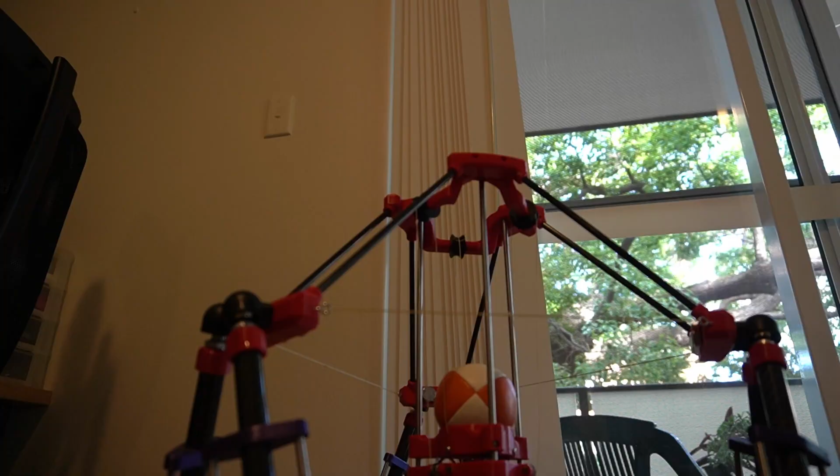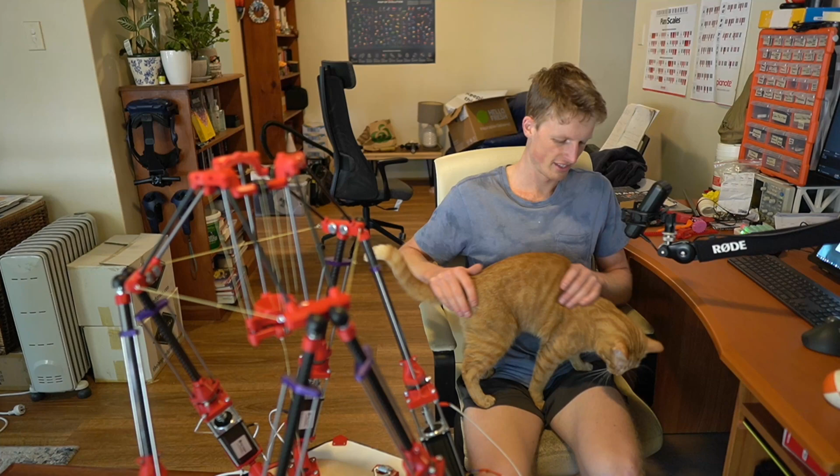Before that, I was spending a lot of time trying to get the timing right to get it to move around, and trying to key the relationship between, or map the relationship between, the legs moving around and this string getting pulled. That was a little bit tricky, and I could never quite get it to work.

So I've just finished 3.5-ish days of coding, and it's going relatively well, I think. Some parts definitely went a lot faster than I was expecting them to. The first bits I was expecting to take a really long time, like getting all of the matrix math working to calculate all of the Bezier curves. I was expecting that to be a little bit tricky in Arduino, but it was actually pretty fine. So that was good. It was a welcome surprise.

But the less welcome surprise has been the fact that the bulk of the brain part is a lot more tricky than I was expecting it to be. I think in my last video, I planned for making 5 functions to do the whole thing for just throwing and catching one ball in a very simple pattern. And I am now up to 20 functions so far. Granted, not all of them are really properly necessary, but still, figuring out how to feed them into each other is not trivial, I think.

But I made a good bit of progress. I think it's coming along quite well, and I can feel that it's close. It feels like I'm ticking off things to do faster than I am putting them on the list. So that's good, I guess. Yeah, it's coming along. I've only got like 8 more things to go on my list.

For example, a problem I've been having from pretty early on with these linear actuator legs is that there are some nuts in the bottom that I put in to stop it pulling itself apart. Those nuts have just been really annoying. They keep tightening themselves up when they shouldn't, and half of them have come loose from the vibrations anyway, so they're not even doing anything, just rattling around. Bloody nuts, causing me so many problems. No good has come from them. They're very annoying, so I'm definitely keen not to have that problem again.

Something else I'm potentially going to change is to get rid of the motor that's pulling the hand string. The reason is that the ball is only ever going to move in 6 degrees of freedom, and by having 7 motors - the 6 motors of all the legs plus the 1 motor for the hand - this is referred to as overdetermined. When your system is overdetermined, it can be fine if you carefully design it, but it tends to add complexity, and complexity is often better avoided. Sometimes it's very cool, but if you can avoid it, it's a good idea because it's just annoying.

I was having a lot of trouble before trying to map the relationship of the movement of this string compared to the movement of all the legs, because they have to be tied together pretty well. If the legs move up while the string stays still, it's the same thing as me pulling the string down, and this moves up in its rail as well.

But by having really fast legs, I should be able to entirely remove that problem and just tie the string onto the wood at the very bottom, so it'll just be stuck there. Then by moving the legs around, the string length would change, pulling the hand up. I think that's a lot better, a lot cleaner, pretty good. But that requires that the legs are fast and strong.

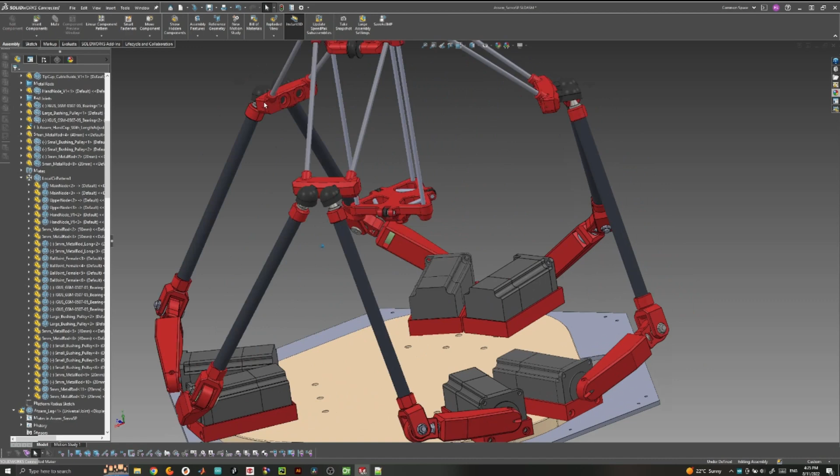So I've got it CADed up here. This is what that design looks like, and you can tell it's very different to what it currently looks like. If SolidWorks is going to play nice, I can drag this around and you can see what it would look like as it's moving. It has a bit of a hard time calculating movement sometimes, but that's what it would look like, which is very weird.

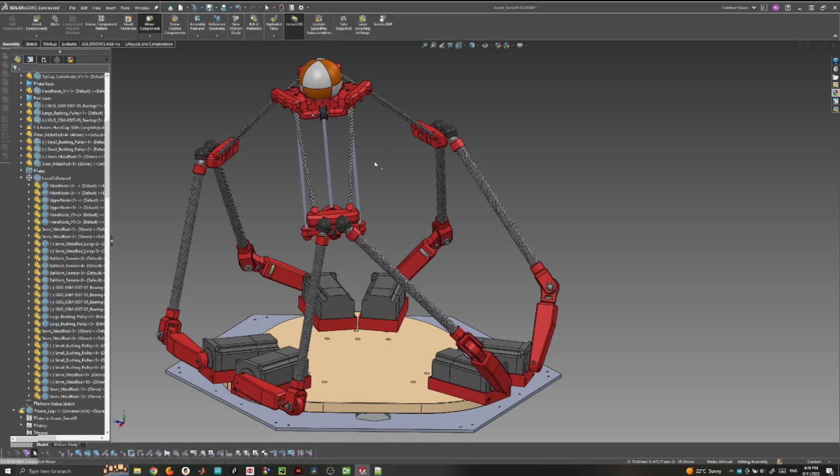I honestly sort of just want to make this just because it would look really weird, even if I don't think Jugglebot would use this. I guess it would be a useful learning experience as well, but the problem is time with all these things. So we'll see if I actually do that or not, but it is very cool. I would have to change some things about how it currently is, because things like this, obviously collisions are not good, but that's pretty easy to fix.

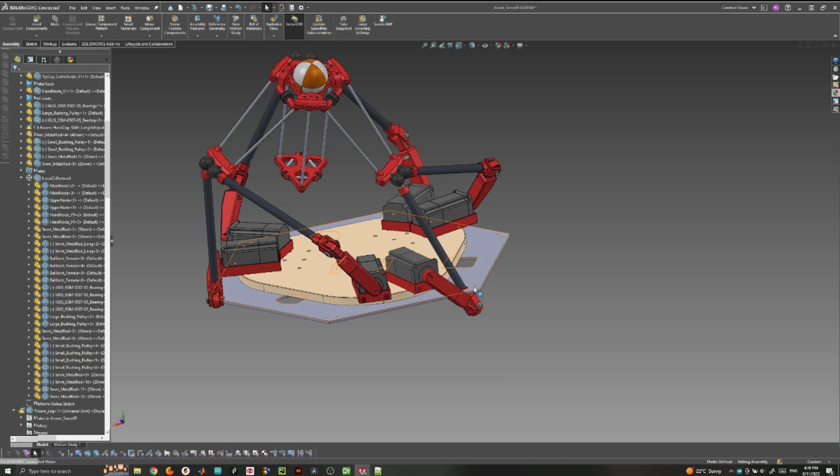So I don't think the motor is going to be strong enough to push the way that I want it to push. I ran a little test with this motor here, with just a long bit sticking off of it, and I was just seeing how strong it was against me pushing against it. It's strong, but it's not super strong.

You might be wondering why I made this leg design the way that I did at all. Why didn't I use the servo arm method from the very beginning? There's 3 reasons for this. One is because according to my calculations and the numbers that I have on these motors and everything involved, I should be able to move these motors 13 times faster than I am currently able to move them.

From all of the information about everything involved here online, the bottleneck would seem to be 200,000 steps per second, where a step is just a little movement of the motor. But what I'm actually getting out is only 15,000, and for some reason I have no idea why, I can't get more than 15,000. Part of this limit could be that I'm using the largest step per revolution increment. These are set to move 400 steps in 1 revolution, so if I tell it to move 200 steps, it'll move half a revolution.

But you can go all the way up to 25,600 steps per revolution, so 1 step is like hardly anything. I think that has something to do with it, but that doesn't really answer the question for me. I don't know what the physical actual limit is. It might be related to that, but I don't know. Doesn't really matter, I'm just going to continue on knowing that it's there now. But according to my calculations, they should have been able to move 13 times faster, which would be fast enough. That's pretty good.

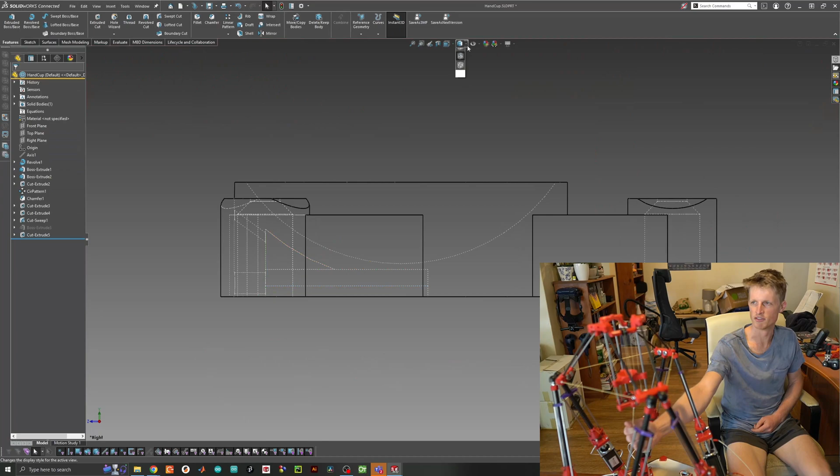Other things - I've redone the whole hand part. It's very similar to what it was before. The main difference is that this pulley at the top here is no longer stepped, it's just a straight over pulley, so it's one-to-one.

So if I move my hand down here holding the string by 5 centimeters, the hand will move by 5 centimeters. Whereas before it was 3-to-1, so I could move 1 centimeter and move that 3 centimeters. Now it's just 1-to-1 because the motor's fast enough.

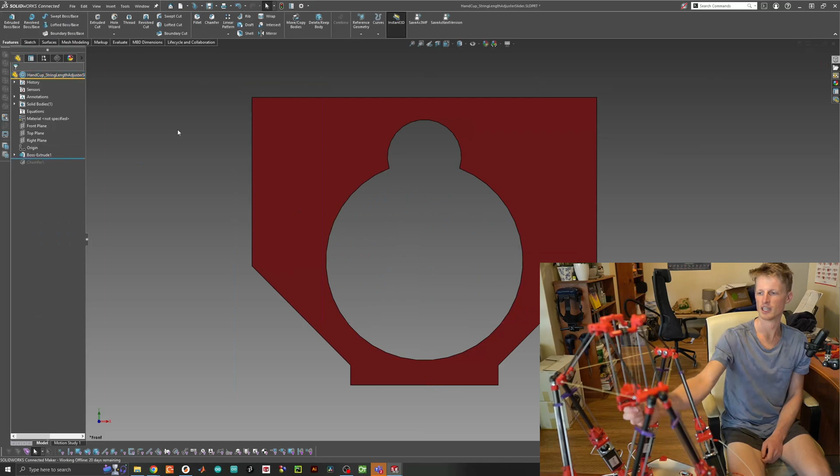I've also changed the way the string is routed around at the bottom a little bit. I got rid of one of the pulleys, mostly because it just didn't fit in the design. I could print off smaller pulleys, but honestly, at one point I've just got the string going straight over a metal rod, and it's pretty smooth.

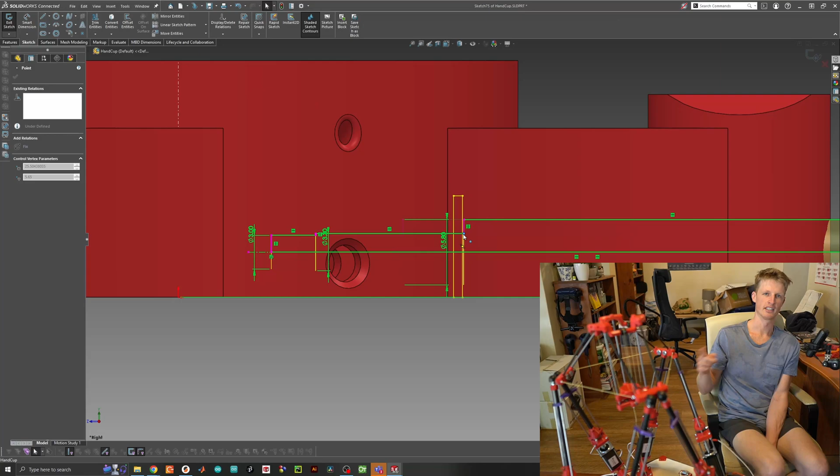Something else I added in this design that I didn't have in the previous one is these 3 arms that hold the metal rods, with linear bearings that slide along these rods. The idea is it makes sure this hand stays completely flat the whole time, because a big problem I was having a little while ago is that the middle part was tilting and not sliding nicely. So I did that to fix it.

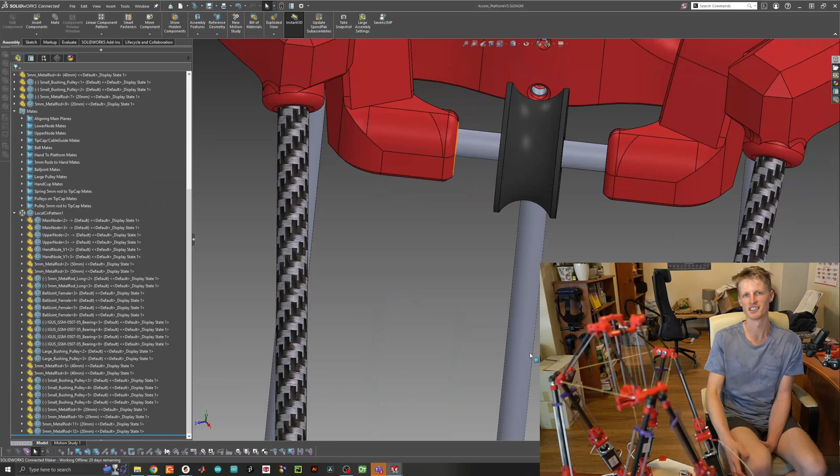I also did a second solution, which was to add an adjusting mechanism so I can control how long each of these 3 strings is and get them finely tuned to be exactly the same. The theory is that if they do stretch, they'll all stretch at the same rate, so that's not a problem. These are all braided together at the bottom here - if they're all exactly the same length, then when I pull them, the hand will have to go perfectly horizontally and stay flat the whole time, which is good.

Earlier, I spent a lot of time developing code that would take in a juggling sequence, or siteswap as I called it in an earlier video. It would take the next value in the sequence, the height of the next throw, and based on the various positions of where it catches and throws, figure out what speed to throw the ball at and where to throw it from. Then it would figure out all of the leg lengths needed to make that happen over a path it figures out. I spent a lot of time on that - it was a good week or so, and it was very complicated.

It was definitely the most complicated code I have ever written, and it didn't work. At least in the tests that I did, it wasn't working as I expected. It would just bounce around a lot, and the timing seemed off with something. It was fundamentally there, and all the tests I could do in the Arduino IDE, just having it print out values at different times, seemed to be working fine, but in the actual robot, it wasn't. I'm not too sure what the problem was.